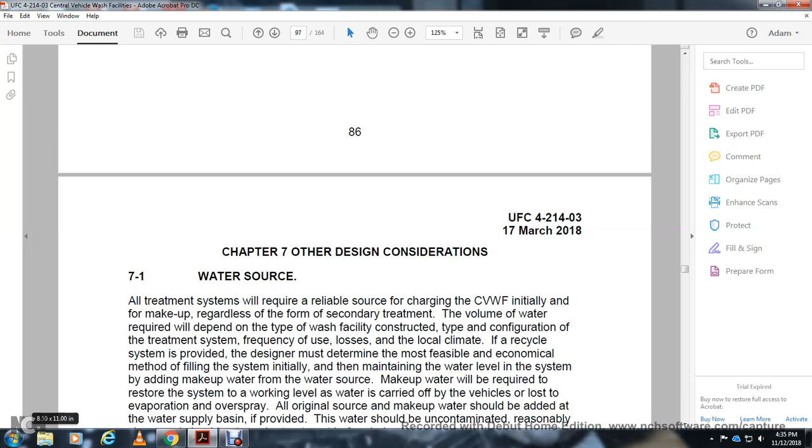Makeup water is required to restore the system's working level as water is carried off on vehicles, lost to evaporation, or lost to overspray. This additional makeup water should be added to the water supply basin, if provided. This water should be uncontaminated, reasonably clean, and should not require treatment before being introduced into the system.

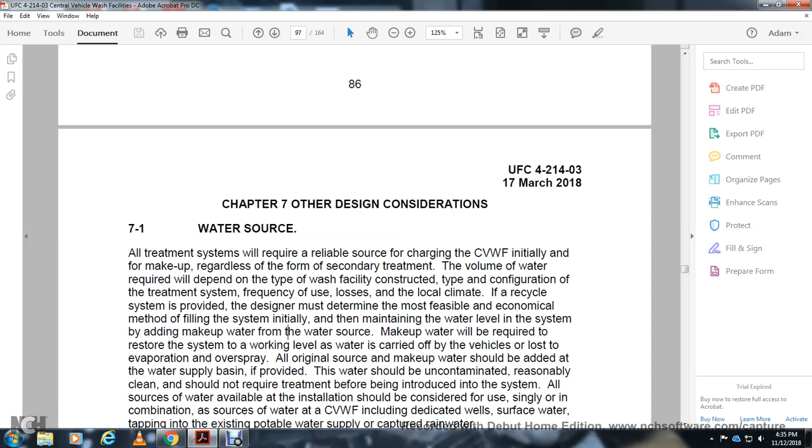All water available to the installation should be considered for use, singly or in combination, as a source of water for the vehicle washing facility, including dedicated wells, surface water, tapping existing potable water sources, or captured rainwater.

7.1.1 Type of facility: for a wash facility with pre-wash, required makeup water at facilities with only wash stations increases due to water loss from vehicle carry-out, overspray, and evaporation. Wash loss from carry-out can be as high as 160 gallons per vehicle. Loss due to overspray and evaporation could be as high as 10% for water cannons and 5% for hose wash stations.

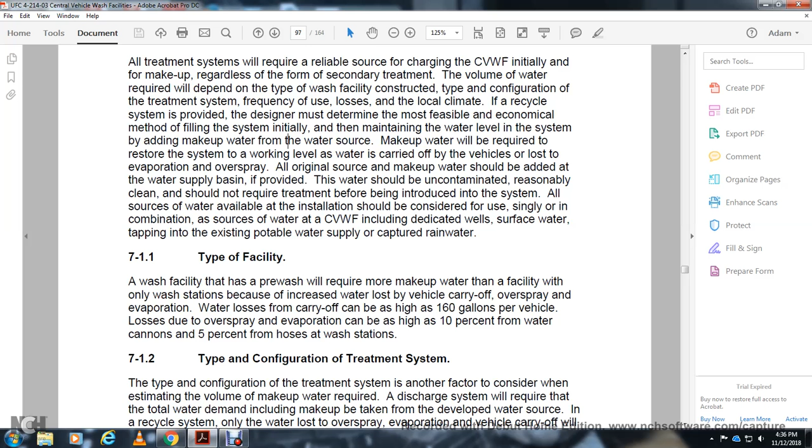7.1.2 Type and configuration of treatment system: another factor to consider is the makeup water required for the discharge system, which will factor into the total water demand, including typical makeup water developed from the water source.

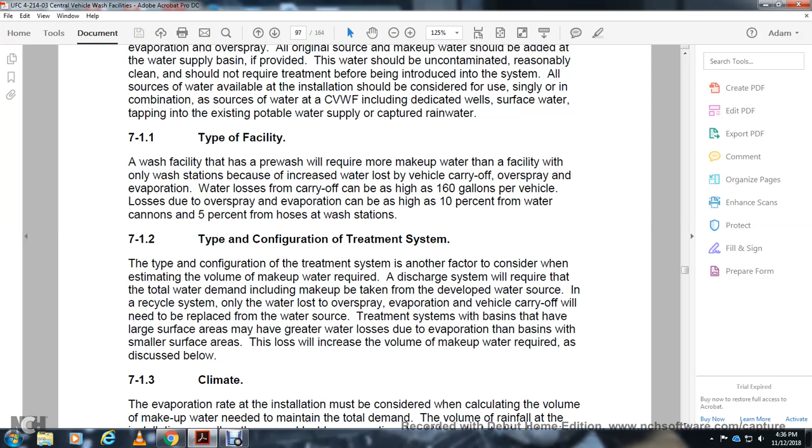In a recycle-only system, water loss from overspray, evaporation, and carry-out creates the need to replace water in the treatment system. Basins with a large surface area have greater water loss due to evaporation, while basins with a small surface area have less loss, increasing the volume of makeup water required, as discussed below regarding climate.

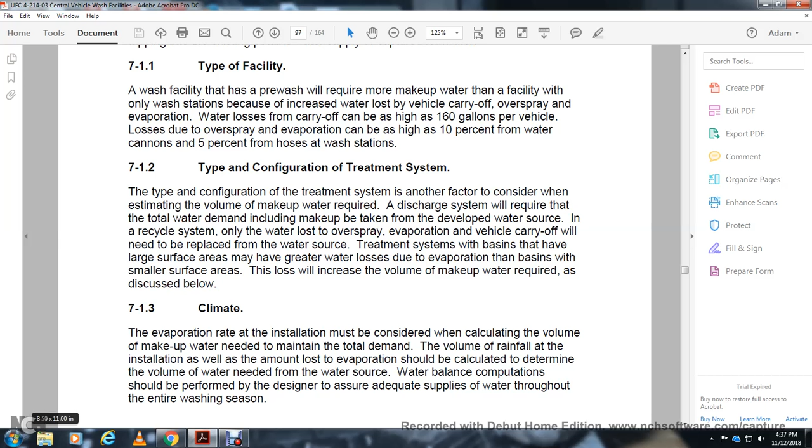Wastewater piping should be conveyed by gravity when possible and economical. Pumping should be avoided because residual oils can become emulsified and difficult to remove, and solids can wear down pump components. Pump addition also adds significant capital and operating costs to the facility compared to gravity sewers for water conveyance.

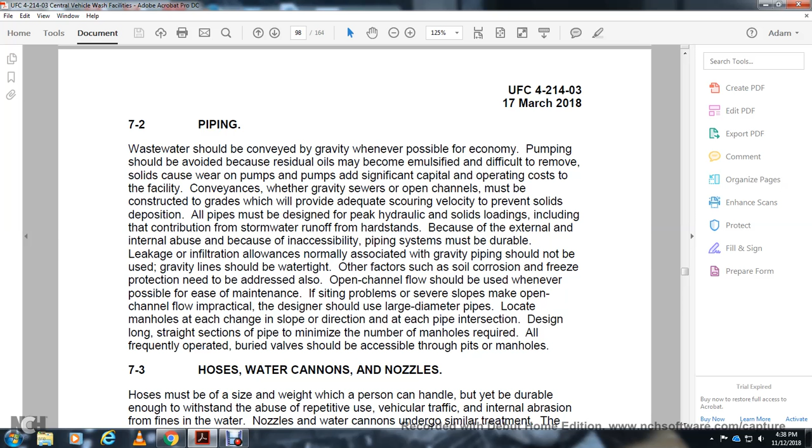Open channels should be used whenever possible, easing maintenance, unless siting problems or severe slopes make open channel flow impractical. The designer should use large diameter pipes, locate manholes at each change of slope or direction and at each pipe intersection, and design long straight pipe sections to minimize the number of manholes required. All frequently operated buried valves should be accessible through pits or manholes.

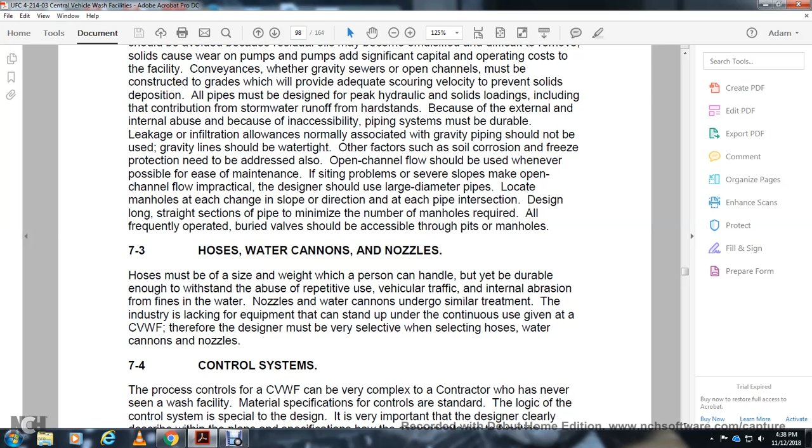7.3 Hoses, water cannons: hoses used must be sized so a person can handle them, yet durable enough to withstand the abuse of repetitive vehicle traffic, internal abrasion from fines in the water. Nozzles and water cannons undergo similar treatment; the industry lacks equipment that can stand up under the continuous use of a given vehicle washing facility, so the designer must also be very selective in choosing hoses, water cannons, and nozzles.

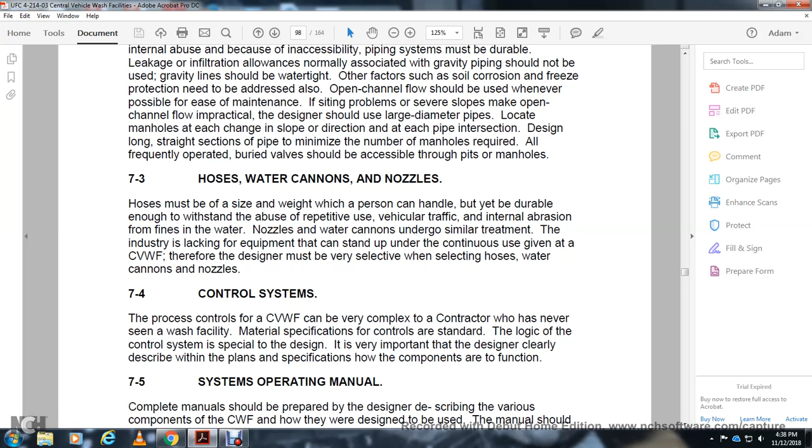The design should clearly describe the plan and specification for how the components function together. A complete system operation manual should be prepared by the designer describing the various components of the central vehicle washing facility and how they are designed to be used.

The manual should establish operation procedures, including staff schedules, safety records keeping, and other operational responsibilities. The control system should be illustrated with step-by-step instructions, providing for both standard procedures and special procedures. The manual should also establish maintenance responsibilities for elements of the central vehicle washing facility.

Preventive maintenance will be performed by operators trained for the use of the manual, along with having spare parts for critical items. The training of the operator is very important.

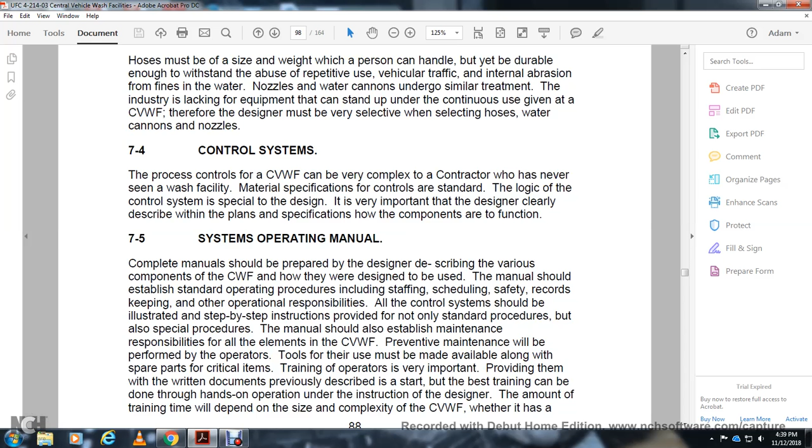Operators should be provided with written documentation as previously described, and the best training can be done through hands-on operation with instruction from the designer. The amount of training time will depend on the complexity of the central vehicle washing facility, such as whether it has pre-wash or a recycled water system. For a simple vehicle washing facility, training could be accomplished in one day; for more complex facilities, the training period could be up to a week.

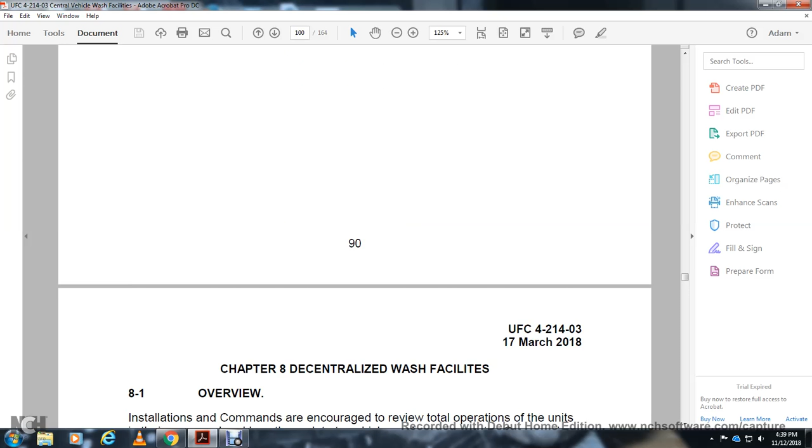That was Chapter 7. Chapter 8: Decentralized washing facilities.